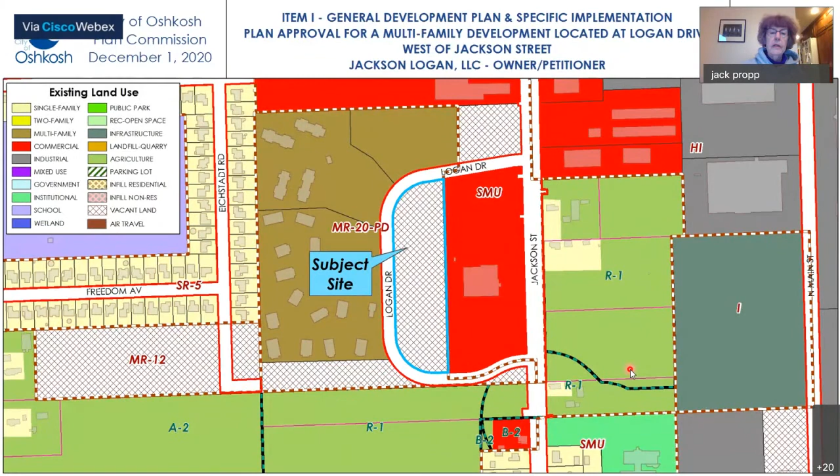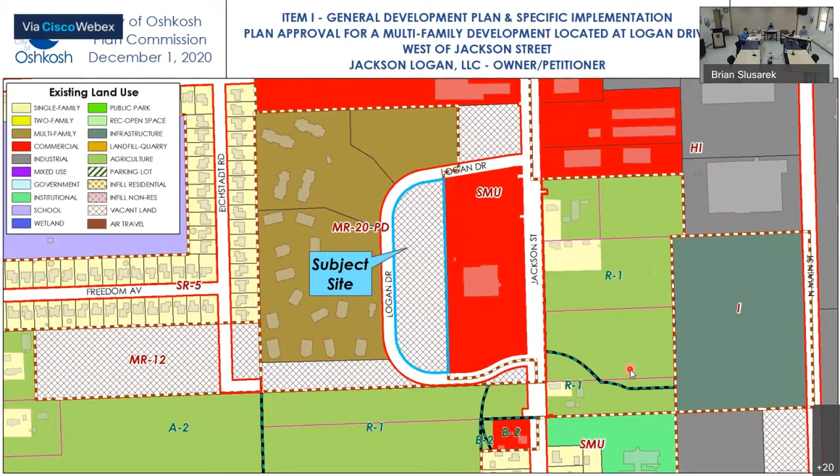The subject site is located west of Jackson Street, a vacant parcel with frontage on Logan Drive, zoned MR20 PD, the surrounding area being mostly multifamily residential, commercial, and vacant land uses. Here's an aerial view of the subject site, again currently vacant.

Here's the proposed site plan. It will include 6 townhome-style apartment buildings with 48 units for a total of 126 bedrooms. It will have 2 accesses from Logan Drive, with 1 driveway going through the site. Each unit will have a 2-car attached garage. The site will meet all applicable parking space requirements, impervious surface requirement, and setbacks. There will be a recreation area on the north side of the site per zoning ordinance.

Here's the site lighting plan, which they had submitted an update yesterday. They're showing 20-foot tall poles with full cutoff fixtures per code. They are requesting a base standard modification for lighting level along the southern entrance, as they're exceeding 0.5-foot candles at the entrance. They would like to exceed that 0.5-foot candles just to make sure they have enough lighting at that entrance, and staff is supportive as we do not see any issues with increasing lighting into the right of way in this case.

Here are the building elevations. The applicant is requesting a BSM to allow reduced door and window area on the street-facing building ends to 12% door and window area, where code requires 20%. These are going to be the building ends right here. They note that utility spaces as well as garage areas are located at the building ends, which do not allow for additional door or window areas.

Also, they will have gas and electric meters along those building elevations, which minimizes the area they can add for door or window area. They did note that the gable pediment has been added to these facades to improve the appearance and increase design consistency. Staff is supportive of the BSM to allow the reduced door and window area, as there are hardships related to the building design, as well as the lot configuration that does not have feasible concealed side yard area for those facades.

We also feel that the applicant has sufficiently offset the BSM by enhancing those facades with the use of gables and also including Class 1 materials, which are brick and stone veneer, to improve the appearance of these building ends. As far as having the gas and electric meters on the building ends, staff is recommending a condition that they match the color of the building, and also install landscape screening around those utility features to screen them from the right of way.

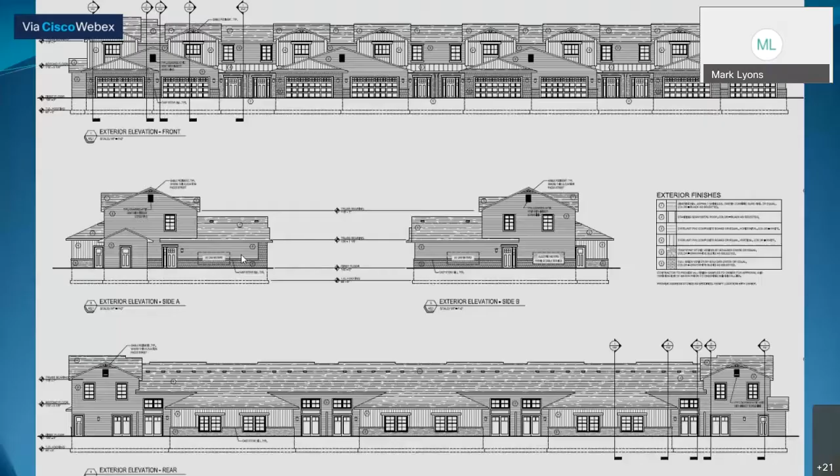Any comments on that, Mark? I know Mr. Gierach is here. Justin, this is a new development, this will require sidewalk, correct? They can install it on their own, but with it not necessarily going anywhere, it wouldn't be a requirement. They will get it installed through the driveways. It's something they can install on their own. Otherwise, at such time when council does order it in, it would get installed then. I've not been made aware of any major concerns or requests in this area for sidewalk, since Logan Drive kind of doesn't go anywhere either.

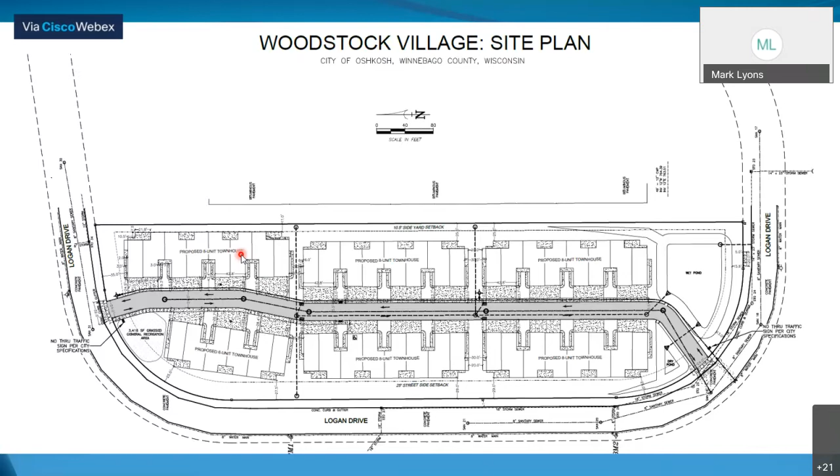But this could potentially be a section the city looks at ordering in, to make sure these individuals have a connection. It could be ordered in on the development to the east as well, correct? Absolutely. That may be something we'll want to evaluate further. If there's no more discussion from the commission, we'll call for the vote.

Perry, aye. I have to speak up a little more, Stephen, you're a little hard to hear. Stengel, aye. Marshall. Coulibaly, yes, aye. Davey, aye. Ford, aye. Gross. Kiefer, aye. Mitchell. Hintz. Propp, aye. Motion carries 7-0.

I don't know why, but it's not very easy to understand. We can live with it, but if something can be done to improve the sound of the microphone, that'll be good. Yes, there's an echo. Stephen, do you have a microphone directly in front of you? If not, make sure you do. I do, Mark, hopefully. I think Jeff just addressed something on it, so we'll see if that fixed it or not. And just now, that was nothing but echo, I really didn't hear anything clearly.

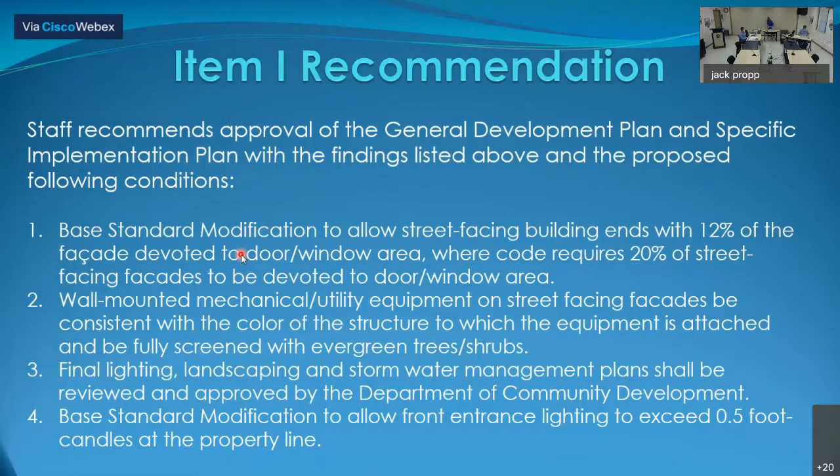Well, we'll open item 2, public hearing, zone change from central mixed use district with a planned development overlay to central mixed use district alone.

At 500 and 502 North Main Street. Were there any site inspections? The chair will accept the staff report as part of the record.

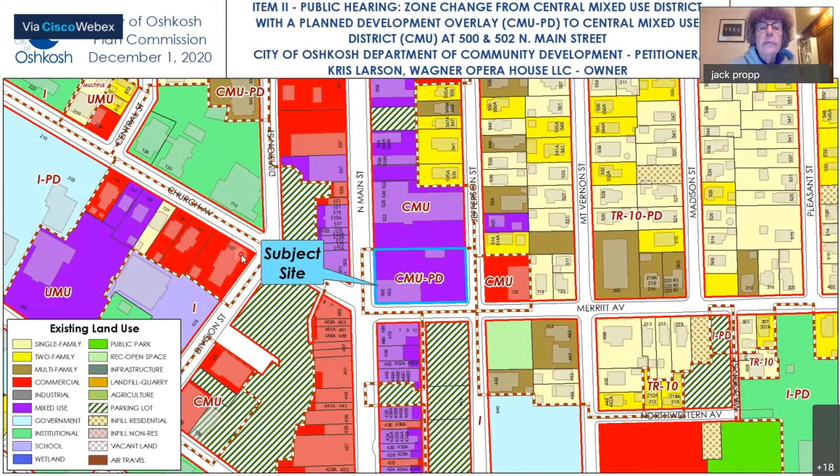Thank you. So the subject site is the Wagner building located at the northeast corner of North Main Street and Merritt Avenue. Earlier this year, it was rezoned to have a planned development overlay to allow for additional signage beyond what code allows. As temporary signage, the temporary signage has now been removed. So the city is requesting to remove that planned development overlay to just have it zoned straight central mixed use, as there's no longer a need for it.

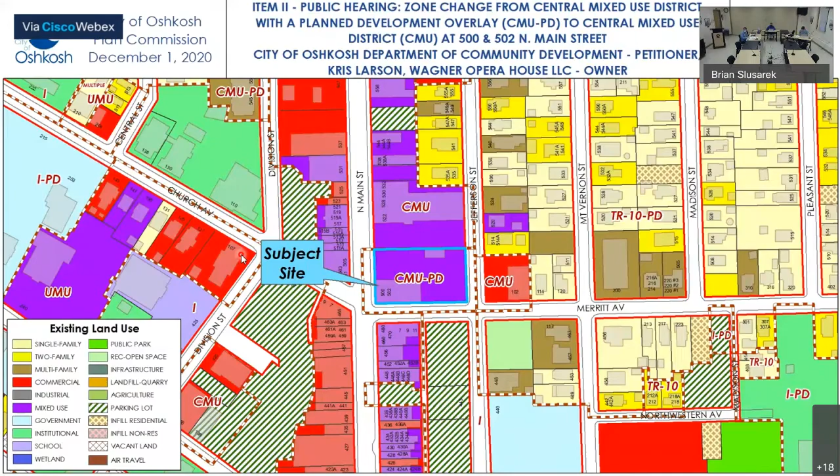There are no unique circumstances that necessitate having that planned development overlay. So staff recommends approval of the zone change from central mixed use district with the planned development overlay to central mixed use district.

Are there technical questions of the staff? Mike Ford: Yes, so this petition was brought by the city, correct? So the applicant or the owner of the property was not charged a fee? That is correct. The city is the petitioner on this.

If Plan Commission and Council will recall, at the time that this plan development went forward several months back, everyone had kind of indicated they felt we should remove it when it was complete. So based on that feedback we had from Council and Plan Commission, we went ahead and moved forward with that zone change and removed the PD once the sign was taken down. Awesome, thank you.

Any other technical questions? Then we'll open the public hearing. And since the applicant is the city, there's no applicant present directly here, right? Correct. We are the applicant. Okay. Is there any other public comment on this zone change? Any public that wishes to speak on this zone change? If not, I'll close the public hearing.

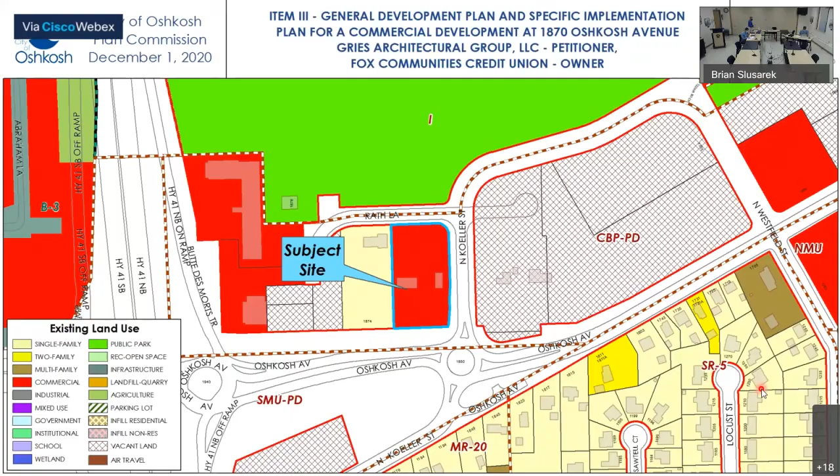Okay, so the subject site has frontage on Oshkosh Avenue, North Koeller Street, and Rath Lane. It is zoned corporate business park with a planned developments overlay. So here's a view of the subject site.

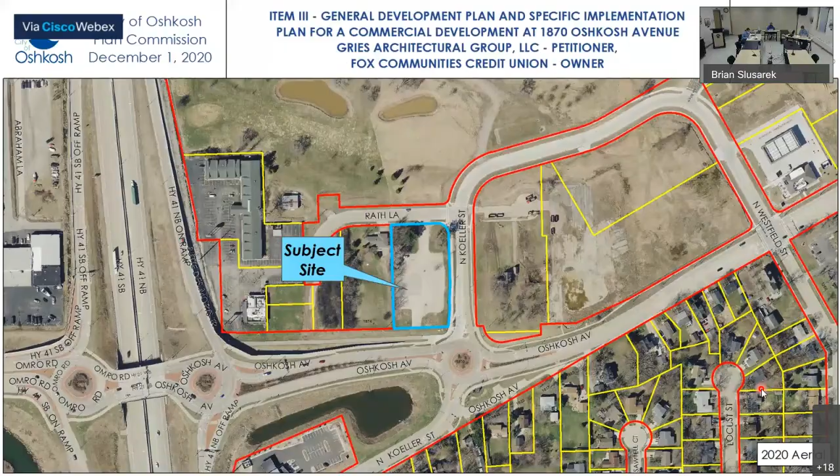The applicant does plan to combine the property with the two neighboring parcels to the west. So here's the site plan. The applicant is proposing a commercial financial institution building with a 4-lane drive-through on the west side of the building. The site will have one entrance and exit and one exit-only access, both along Rath Lane. The development will require an access control variance, or actually multiple access control variances, one for reduced lateral clearance and one for driveway spacing, which we'll address at the end of this item.

The applicant is requesting a BSM to allow additional parking spaces beyond the code maximum of 19.5 spaces. They're requesting 28 total spaces.

According to the applicant, they need these additional spaces as they anticipate having 12 employees and 14 customers at a given time, and need 2 additional spaces for additional staff or outside vendors.

They are also requesting a BSM for the dumpster enclosure placement, as it's located between the building and public right-of-way, to the north of the building between the building and Rath Lane. Staff feels that's an appropriate location, as it's along the more minor of the street frontages and sufficiently set back from the front property line.

The applicant is requesting BSMs for street setbacks. The code requires a 30-foot setback from all 3 frontages. The building itself will meet all setbacks. However, setbacks for the parking area along the north and the east will be reduced.

Here's the landscape plan. They will need to add additional shrubs to meet the overall building foundation landscaping requirement. They are requesting a BSM to allow the 50% main entrance side building foundation landscaping requirement to be devoted to the south and east sides rather than the front. Staff is supportive of that as the south and east are the more prominent street frontages.

They are missing 4 parking row end trees, so they will need to add those parking row end trees. We can address that during site plan review.

Also, they are showing medium trees being applied to the paved area landscaping requirement rather than tall trees as required by code, and they're showing the tall trees along the street frontage. If they would switch those around to have the tall trees for the paved areas and the medium trees for the street frontage, they could meet both paved area and street frontage requirements. That's another thing we'll have to address during site plan review.

Also, the corporate business park standards require 50% of the yard landscaping points to be located along street frontages, and they are meeting or exceeding the overall yard landscaping point requirement, but they will need to verify that 50% of those points will be located along those street frontages.

Also along the Oshkosh Avenue right-of-way, staff is recommending a condition that 200 tall and medium evergreen tree landscaping points be included in front of that drive-through lane to provide a year-round visual buffer from the drive-through lane.

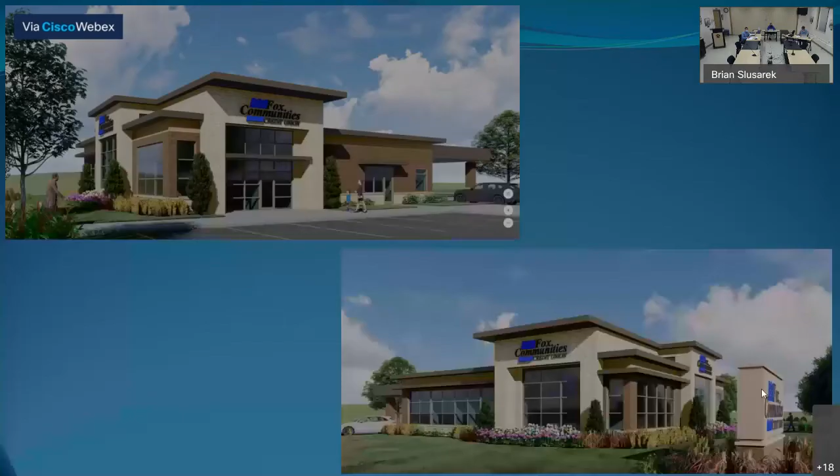Here are color renderings of the building facades, shown in the upper left. They are exceeding the class 1 material requirement on all facades, and they are requesting a BSM for reduced door and window area on the north facade, which is fronting Rath Lane.

Staff is supportive of a reduction to 29.2% as proposed, where 40% is required. We are supportive of this because they are exceeding the overall class 1 material requirement, and that will serve to enhance the appearance of all facades.

Here are the color renderings. The applicant is requesting base standard modifications for decreased setbacks, increased parking, a landscaping point adjustment, and reduced sign setbacks, as well as reduced street-facing door and window area on one facade. The applicant is offsetting those BSMs by exceeding the overall landscaping requirement and exceeding the overall Class 1 material allotment for all building facades.

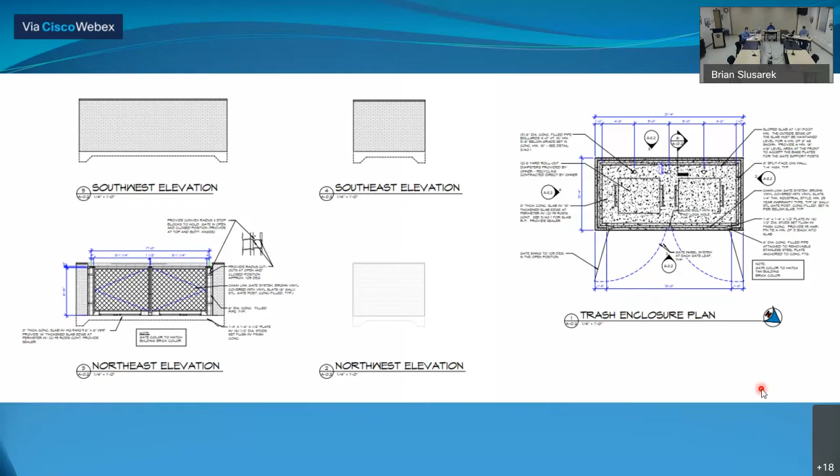Here's the dumpster enclosure rendering, and they will be using brick to match the building as required by code. With that, staff recommends approval of the general development plan and specific implementation plan with the findings and conditions listed in your staff report.

As earlier mentioned, they will need two access control variances. One will be for stacking at the entrance and exit. They're proposing to reduce down to about 46 feet, where code requires 75 feet. Staff is supportive of that reduced stacking distance since it's relatively low traffic counts to the site, and they'll still be able to fit 2 to 3 cars for stacking within that lane.

They're also requesting an access control variance for reduced spacing of the two driveways to 63 feet, where code requires 105-foot spacing. Staff is also supportive of this since the western access is only for exit and should not cause any traffic concerns.

Are there technical questions from the commission?

Just a couple additional comments from staff, if I could. There are a number of base standards here, and they are consistent with what we've done for a lot of the area. Obviously the corporate business park has been held to a much higher standard than a lot of our other zoning code requirements. So this is in line with what we do to the east with Mr. Hoopman's developments, Mr. Steiner's developments, the Casey's, and some of the others, where we're pushing the signs out in front. We want those buildings all right at the 30-foot setback wherever possible.

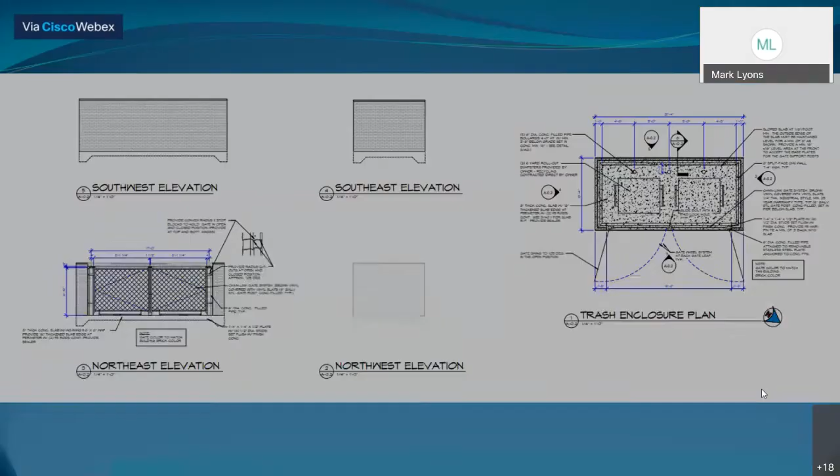I'm trying to have the drive-through facilities shielded as best as we can. This developer's done that, with a little bit of additional landscaping in this situation, by relocating that drive-through to loop around. That necessitated the need for that second access drive, which is why we're going through the access control variance as well. So I just wanted to note that the project is very consistent with a lot of what we've done in the area.

The reduction on the window requirement for the north facade—when we wrote that requirement, we were really looking at those immediate street facades. When we get into some of these triple frontage lots, the intent was never to apply it to that north facade, but the way the code got written, it does technically apply. So it makes sense to grant some of these waivers within the scope of the project.

Okay, technical questions, anyone? Can you display the landscaping slide again, please? Okay, thank you.

So on the south side, which is on the left side on this—yes. So the landscaping there, I presume, is to mask the traffic along the drive-through, but I have the impression that there is an open window at the bottom of it. Could that be expanded a little bit so that it can be functional?

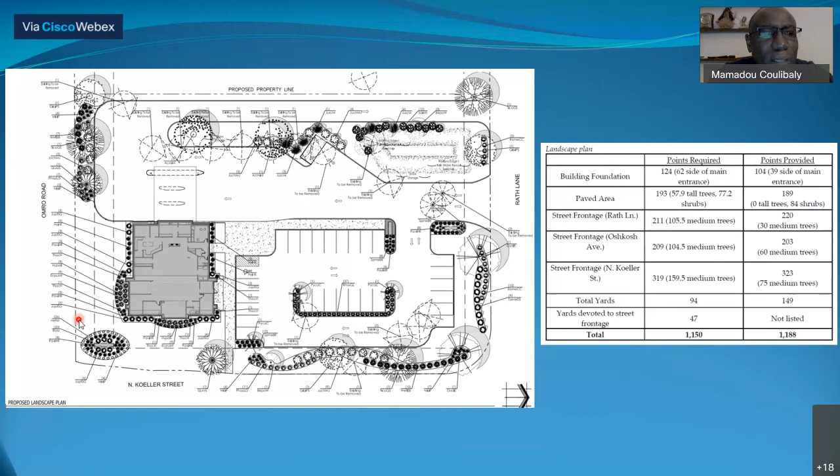I think one thing is they had shown the two tall trees there as street frontage landscaping points, but if they would shift those to be the paved area points, and put medium trees as required by code to meet that 50% point requirement, I think that will shift some of this landscaping further to the south to provide more buffer there.

Okay, all right. So it is not quite the way it looks like here. Correct—they'll need to be adjusted, and we'll address that during site plan review to make sure they're meeting that street frontage landscaping, and also providing the evergreen trees along the drive-through to screen that from Oshkosh Ave.

Yeah, there's a couple minor variations that need to be made to make the landscape plan code compliant. That's why in these situations you'll typically see us add a condition that the final landscaping plan be approved by community development, so we can work through these slight modifications with the applicant while still keeping them on track for their project.

Okay, I see that Margie has raised her hand. Is that right? That's correct.

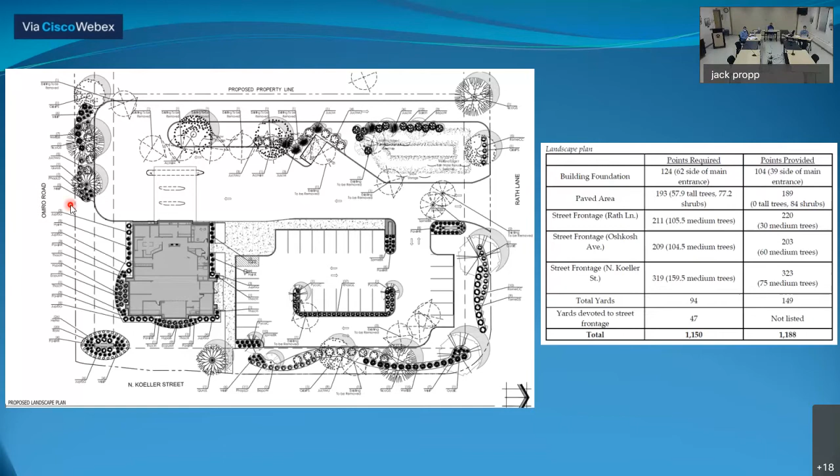I don't know if this is so much a question as a comment. First of all, it's beautiful—it looks very nice. The renderings with all the trees and the pretty brick all look terrific. But I do have some concerns about the size of the sign. I know it's consistent with everything else we've been doing there, Mark, but my concern is that it's going to be difficult for cars pulling out to see people or bicycles coming. And we have to remember this is an entrance to the park.

So I think that we're kind of forgetting we've even got a park back there, since we don't actually see that yet.

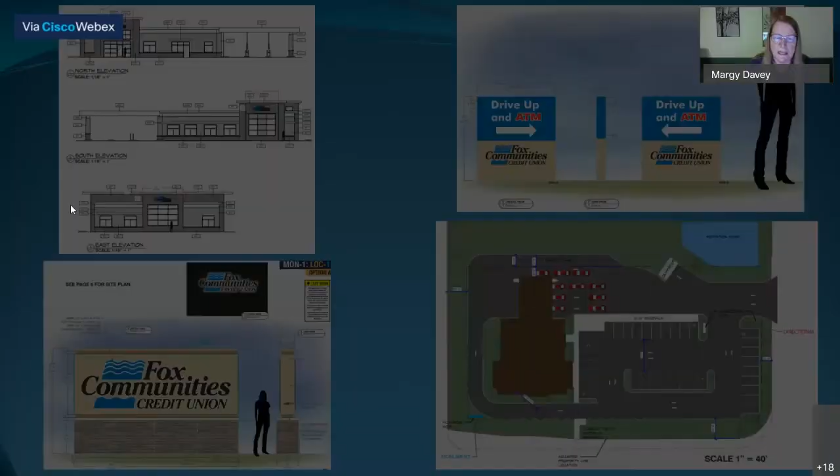I also have a concern about the amount of impervious surface. I know it's showing up here as 32%, and Brian and I talked about this earlier today. That's because of the large section that is nothing at this point, but hopefully that will be something someday. So I think it's a little misleading to say this is 32% when we know that's not their final intention. However, I know we did add some last time because of the safety issue, and safety does trump sustainability, I guess.

Speaking of sustainability, one solution to the additional parking spaces may have been to realize that this is on a bus route, and that this could be a location where potentially there could be bus riders that work there, or carpooling going on. I'm not sure that allowing all the parking anybody could ever use is really the most sustainable action we have. But again, these are just comments I wanted to make.

I'm not going to vote against any of this. It looks nice, it does.

One thing I will note with the sign, that's something staff had a concern with, is visibility there. It is out of our clear sight triangle as required by code, so we wanted to make sure we're not impacting those direct sight lines. Definitely a concern we share with you as well. Thank you, good to know.

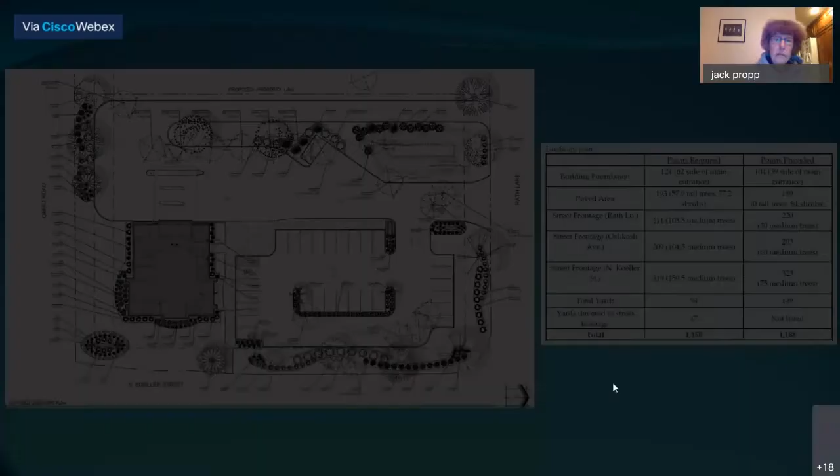Good afternoon, this is Brandon Grease with the architectural firm, and Greg Hilbert, the owner rep, is on as well. Greg, I'll make a quick statement and then you can add anything. Appreciate you guys hearing this tonight. Staff's been great to work with up to this point, and glad we went through that workshop session. I think we're all happy with how that worked for us and the city with the drive-through.

But outside of that, if there are any particular questions, we're here to answer. We appreciate all the help that Mark and Brian and the entire staff have given us. So that's all I had to say.

Any questions? Actually, I have a question relating to the vacant part of the site that is not part of today's action. Do you have anything planned for that? There's nothing planned today. That was a purchase where the site was really narrow, and it secondarily allowed us to get the drive-through not going past the front of the building. So really there's no plan for that parcel to date. Okay, so it'll be green space for the time being then? Correct. Okay, thank you.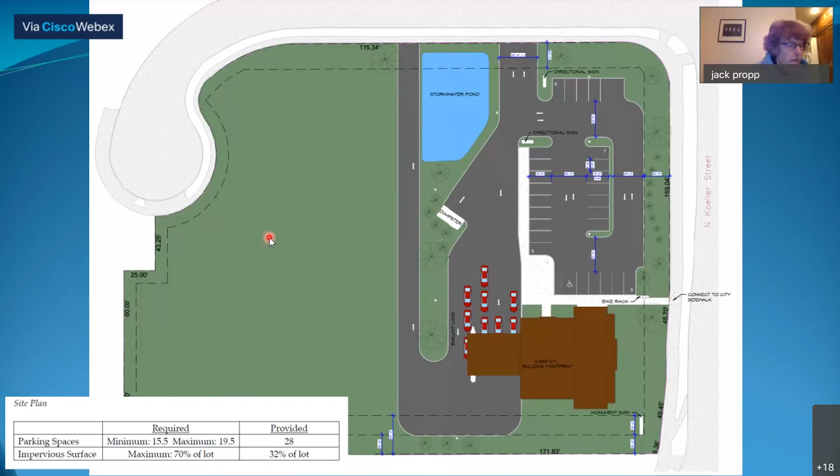Any other questions of the applicant? I don't see any. Is there any additional public comment? Anybody from the public wishing to speak on this item? Anybody wishing to speak on this item? Okay, I don't see anybody. Then we'll close public comment. Any closing statements from the applicant? Anything else you want to say?

Nothing from my end. Greg, did you have anything else to add? Can you hear me, Brennan? Yes, everyone? Yes. Okay, thank you.

Thank you. I think you summed it up very well, Brennan. I appreciate the comment on some of that final tweaking and the landscaping out by the ATM and drive-up. Obviously, when you're giving out cash, we just got to be conscious of bad guys hiding near that area. That would be the only thing we'd hope to continue to work with staff on for any fine tuning there. But clearly we want to make this a win-win for both the city and this area of Oshkosh, and we appreciate all the helpful advice and efforts put forward. So with that, thank you.

Okay, Commission, I need a motion. I'll make a motion to adopt the findings and recommendations as stated in the staff report. I'll second.

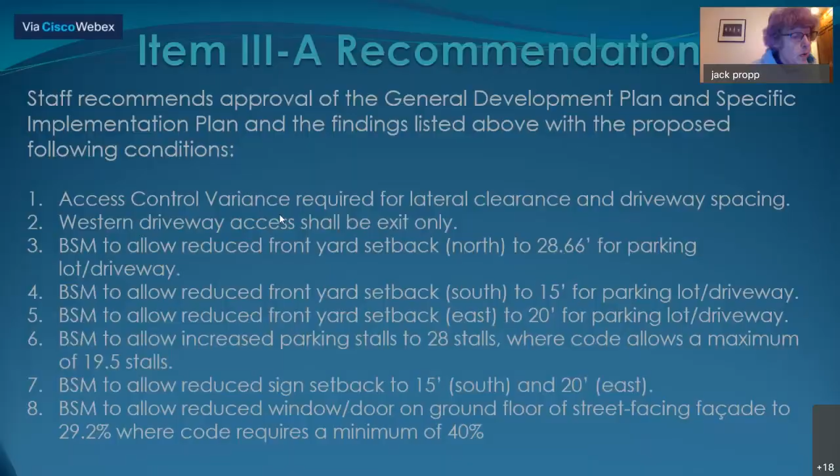Okay, we're moving right along. Item 4 is a public hearing, conditional use permit request to make a legal use under the previous ordinance a legal conforming use at 3849, 3851, and 3850-52 Parkview Court. Thank you, Madam Chairman. Can everybody hear me?

Were there any site inspections? I guess not. The chair will accept the staff report as part of the record. Now you can go ahead and give the staff report. Thank you. Can everybody hear me? Okay. Yep, go ahead, Jeff.

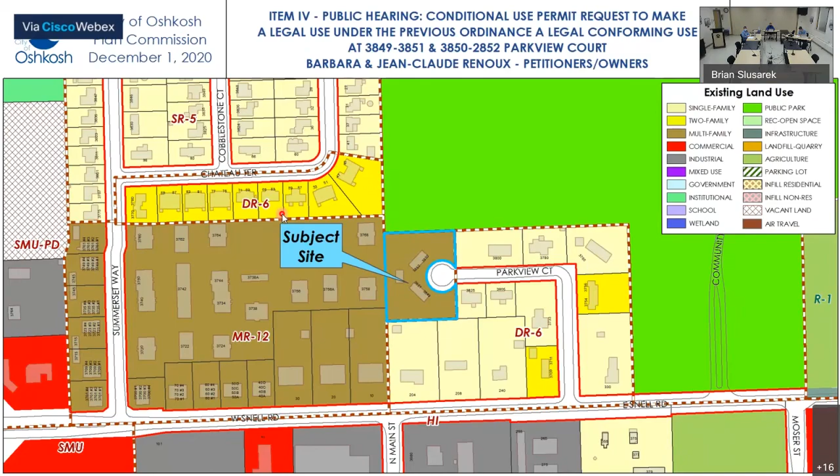This request is going to be utilizing section 30-131 sub B sub 2, which states that any legal use under the previous zoning ordinance, which is made non-conforming by this chapter, may apply for a conditional use permit to be granted legal conforming status. The subject site is a 1.25 acre lot generally located north of Snell Road, approximately a quarter mile east of Jackson Street. The property contains 2 duplexes, an 800 square foot 4-car detached garage, 3 driveways, and off-street parking areas. The property was developed in 1978 as a legal conforming use while in the town of Oshkosh. Then in 1991, the property was annexed into the city as part of the McBriar annexation. When it annexed into the city, the use became legal nonconforming, as the city at that time and currently does not allow multiple single or 2-family structures on a single parcel under the zoning ordinance.

The applicant made initial contact with the city to inquire about possible land division to separate the 2 duplexes, but due to the site design, it was impractical and would have been costly to effectively split the parcel into 2. The initial thought was the applicant requesting a land division that would have split the detached garage in 2. However, that would have required unsupportable variances from the Board of Zoning Appeals. The second option was he could have designed a lot line that would designate that 4-car garage to one of the 2 duplexes, but that becomes a costly dilemma, as one of the duplexes would be deficient in required off-street parking, and a large amount of pavement would need to be removed and restored to a natural state.

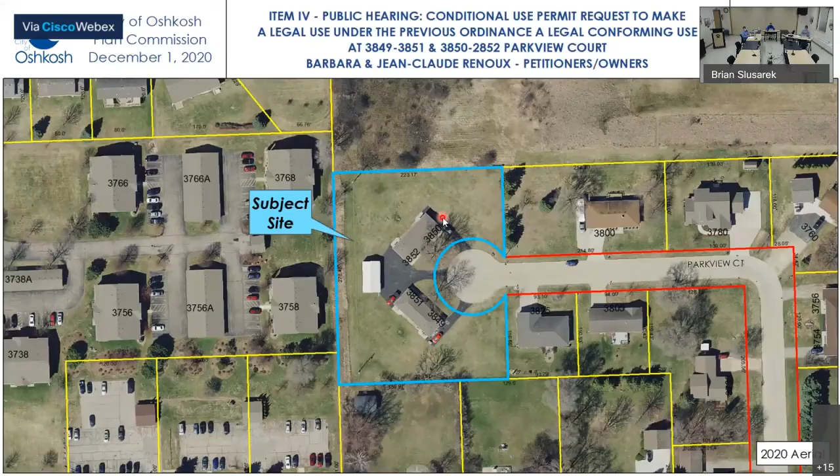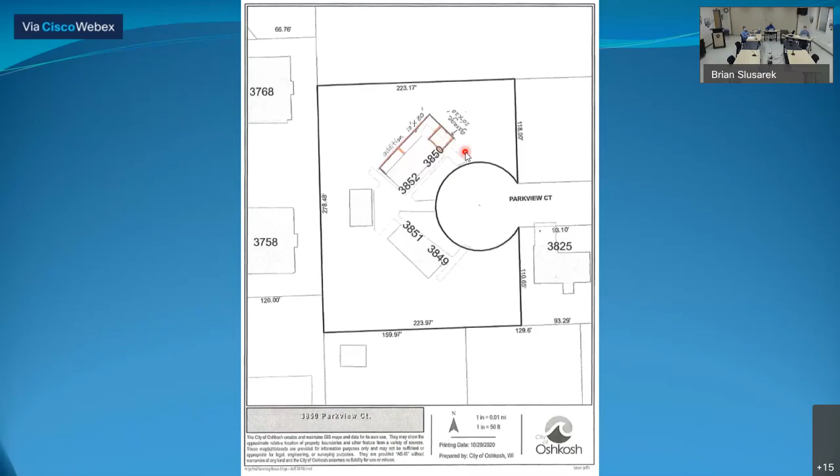Staff is in support of the conditional use permit, as it will take this non-conforming use and make it a conforming use. There will be no adverse effects to the surrounding area since the use has already been established and has been there for over 40 years, with no significant changes planned. With CUP approval, the owner will also be allowed to do continued maintenance without worrying about the 50% cap over the life of the building. So staff is in support of the CUP as requested.

Are there technical questions? I don't, Margie.

This isn't actually a technical question, it's more of a typo question, but I believe we mean 3850, 3852, right? All the paperwork says 28, just in case it's something legal, I thought I'd bring that up. Yes, that was a typo. I'm sorry. I thought so. Look right.